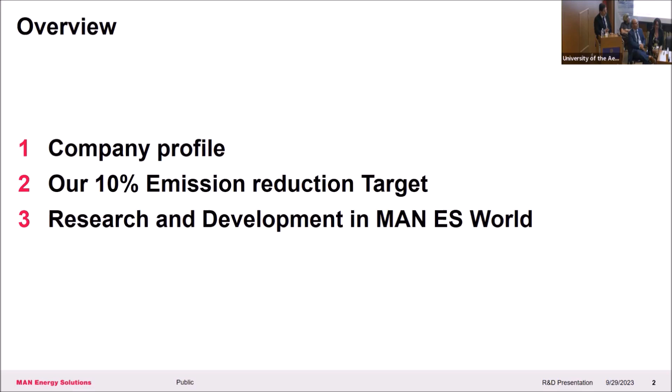What we are doing, first of all, MAN is well known about the two-stroke engines for the shipping industry. However, this is not the only thing that MAN is doing. We are part of the future making. This is our motto for the technology that we are building up. Part of a bigger family.

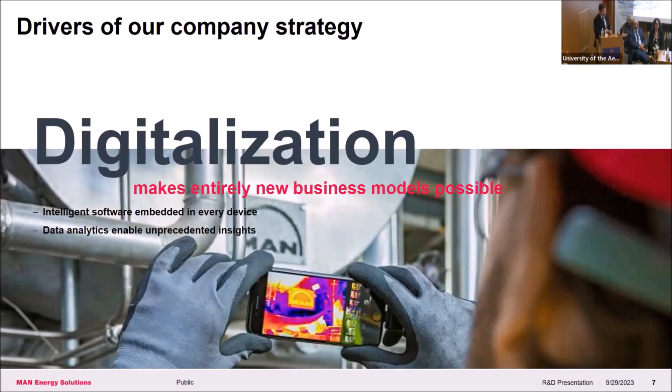So we have and we are building up technology for decarbonization, for digitalization. These two things are going together. And of course, we have also our main pillar, to move big things to zero, which means to contribute to the decarbonization till 2050 to be close to zero.

We try for that in many markets, in shipping markets, in the energy sector, in the heavy industries, the heating, in refineries. And as far as you can see in the next slide, we have a variety of products, not only the well-known two-stroke and four-stroke engines applicable for the shipping sector, but also carbon capture, which we are developing even in Greece with an engineering and R&D department.

We are working a lot in the hydrogen for production of hydrogen, but also for usage of hydrogens. We are doing on an industrial scale heat pumps for district heating, for big industrial companies, canning companies, or companies that need temperatures. And of course, for our sector, we are working on the retrofit of existing equipment, but also we are developing new green engines.

We have a very ambitious target until 2030 to contribute up to 10% reduction of the CO2. This is our ambition, and we try for that. With a study that took place almost 3 years, we identified that in specific sectors we can contribute with the numbers given in this table: 2% in shipping, 5% for carbon capture, 2% for heat pumps, and 1% for hydrogen.

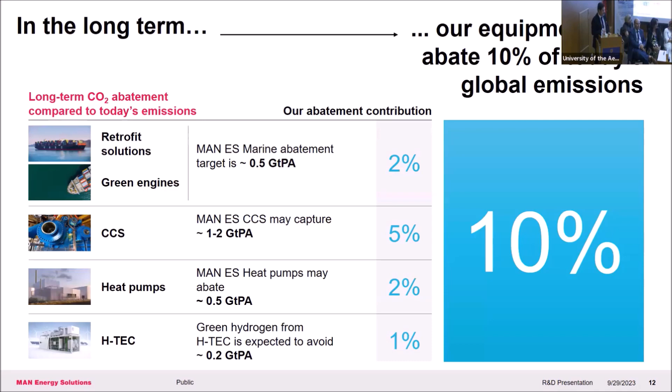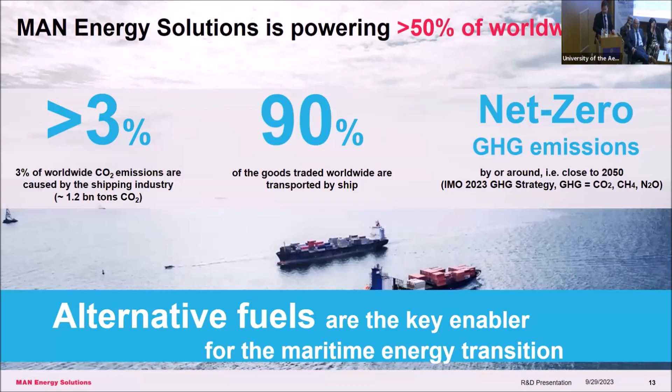More specifically, again, for shipping, you know how much the percentages are. We have, of course, a significant role in these numbers because we have a dominant position in the shipping market. Close to 80% of the two-stroke main engines are designed or produced now from MAN Energy Solutions.

Let's talk more specifically how we develop these technologies and how we communicate with the market. The traditional way is to generate the idea and follow this path: we generate the ideas, we refine the ideas, we assess, we make pilot projects up to a certain extent, and then we start the heavy stuff, which is the development and at the end, the scaling up of our technology. This is the traditional way for doing R&D.

However, we have seen over the last many years and decades that research is not only a process that has to be inside, it is a process affected from many factors, like, for example, there is the strategy and planning and business planning of the company, but we have to deal with the society needs, with the environment, with the new data status that we are facing, with the brand image of our company, the perception that the end users and the society has for our company.

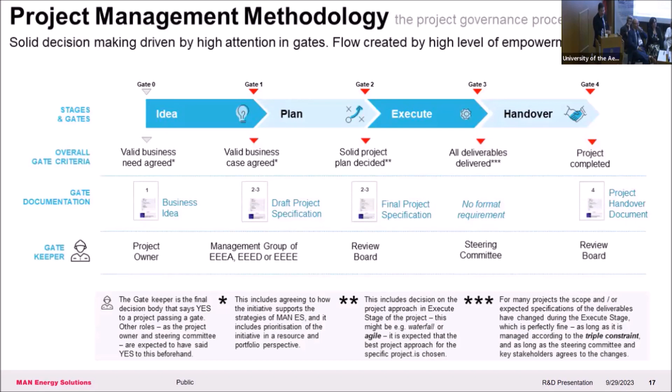Taking all this into account, we have a specific project management methodology for research and development projects, and it is governed by the principle of gates. So we validate a business need — first of all, we are a company, and so we have to take care about the business environment, the business objectives that we have. We create the idea, we plan, we execute, and we hand over at the end of the stage of the final product stabilization, our technology.

For the idea, we support overall the business and technical goals of the market strategy that we have. We try to use realistic technical solutions. We also identify the potentials that we have in the market in order to have a realistic and ambitious materialization and usage of our technology. We deliver the project as planned and agreed, and at the end, the market potential has been reassessed.

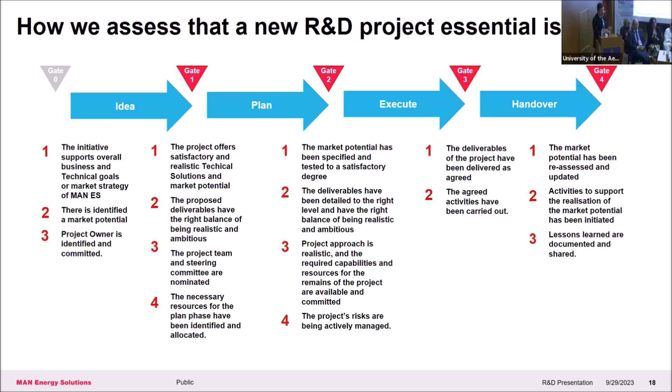We try to optimize and make the final tuning of our products. This is the process that we are following for the research and development strategy. Now there are 4 key questions.

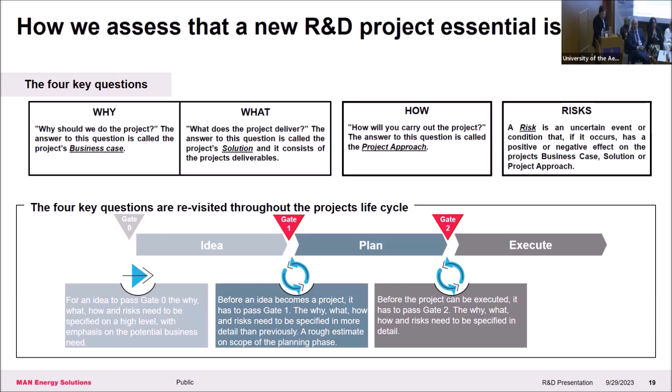Why should we do the project? The answer is called the project business case. What does the project deliver? The answer is called the project solutions that we are offering, which consists of the deliverables we want. How will we carry out the project? This is the project approach, and the risk. The risk is the uncertain event that will happen during this process.

Other factors that contribute to the decision process of research and development have to do with the idea, the regulatory framework, the customer request, the sub-supplier support, and the service experience. All of them contribute in order to adjust an R&D project accordingly.

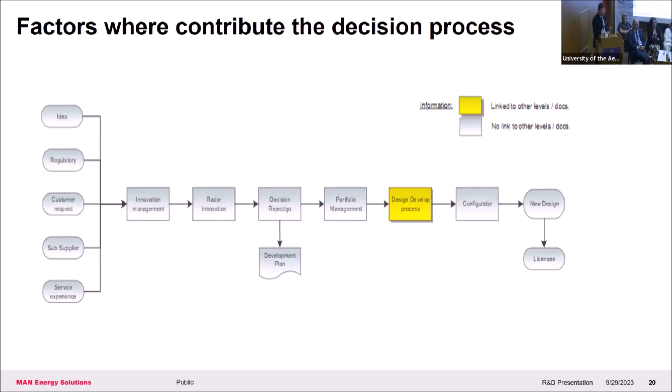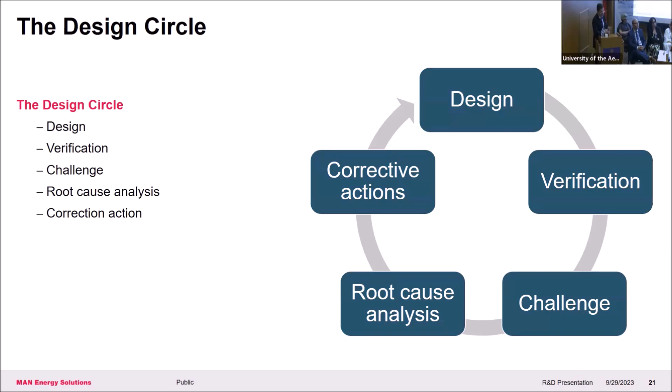We have the design side, which is design, verify, receive some challenges out of this verification, analyze the root cause of the problems that definitely will pop up, and at the end, proceed to corrective actions in order to deliver a ready-for-use product.

To deliver a ready-for-use product, we call it the product stabilization, where it passes through these 6 stages. We observe that there are failures that happen. We report and try to collect as much documentation and as many elements about this failure as possible.

We evaluate the potential solutions. We define the immediate measures, and also inform the customer to cooperate together to develop potential solutions. We develop and validate the solutions, and of course, at the end of this process, we roll out the adaptation that we have done to our products.

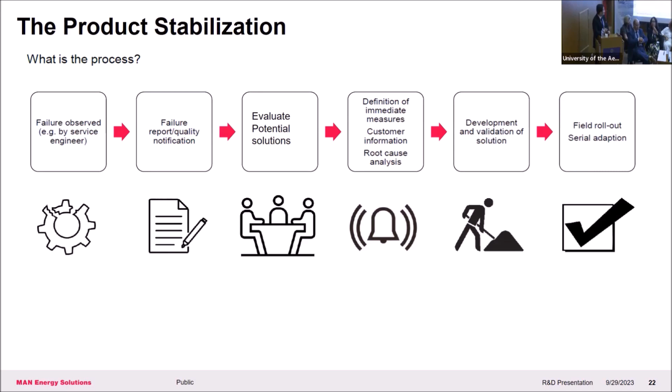More specifically about the 2-stroke technology, it is the dominant technology for marine propulsion till today. Our strategy has, at its center, the people, which is our most important asset, and also we try, through leadership, to have a sustainable organization.

We develop engines with fuel flexibility, the dual fuel engines, where there is a big discussion about which will be the second fuel. We believe there will not be one solution, it will be multiple solutions. We work, of course, for climate protection, and we develop the technology for the zero carbon approach.

Also, in the last many years, we have been working in parallel on our digital projects, where they are helping us for the development phases, but also for the operation phases.

The two-stroke R&D department has a significant role in our organization. They develop the engines, the exhaust gas systems, the supply systems, and the digital solutions for the usage of our engines. They cooperate with all the stakeholders, with universities, with shipyards, with ship owners, in order to ensure that we have the most significant, the most optimum solution.

We are working on a constant basis in our in-house test centers and also on the licensing side, creating - I will not call them only digital twins, someone from my colleagues here has mentioned digital twins - but also creating many times prototypes, twins, in order to verify in real life that what will be released to the market has passed all the gates.

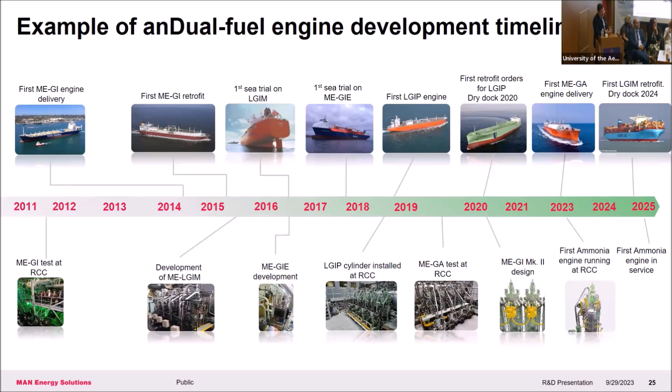An example of the development of an engine is the dual fuel engines that, as you can see, started in 2011 and are still in a development phase, and will continue to be in a development phase, but the fundamentals have been based since 2011.

This is not only applicable for the two-stroke engine, this process is applicable for the entire product portfolio, some of which I mentioned before, and has to do with offshore and onshore applications. Thank you very much.

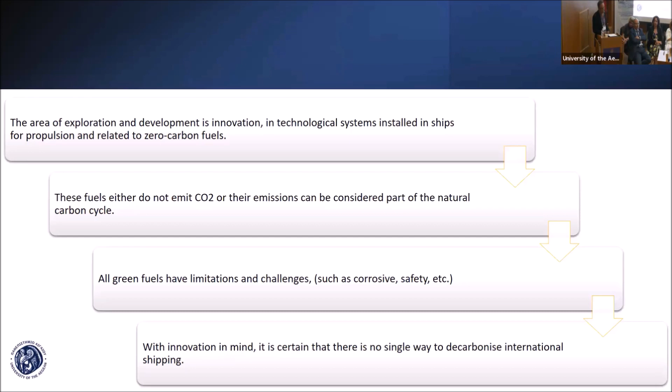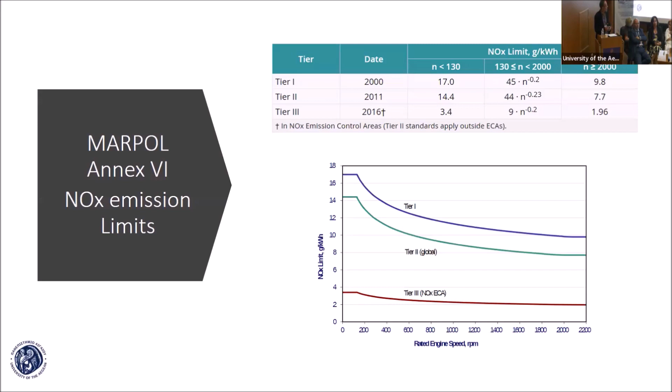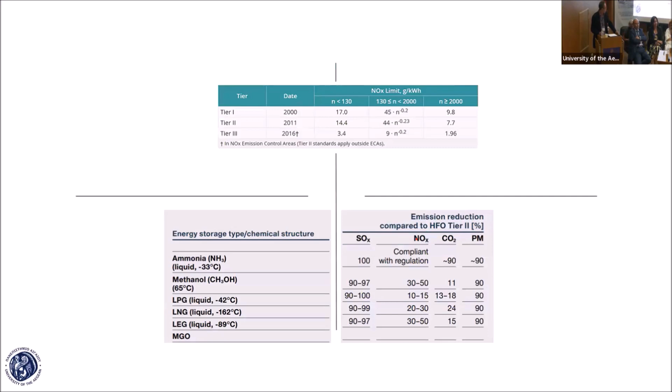MARPOL annexes about emissions of NOx—we have limitations already mentioned previously—and we have alternative fuels that can be used in ship engines: ammonia compliant with regulation, methanol, liquid petroleum gas, liquid natural gas, liquid ethane gas, and MGO, marine gas oil.

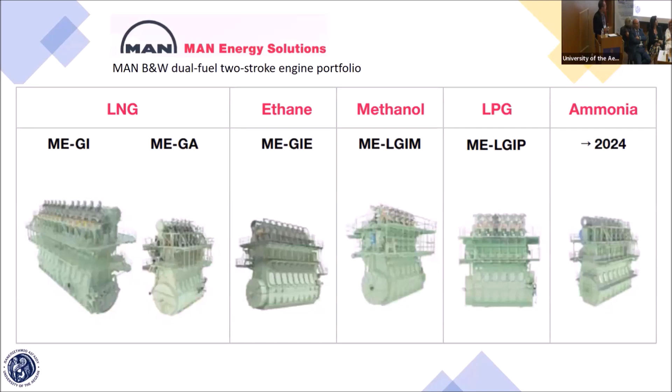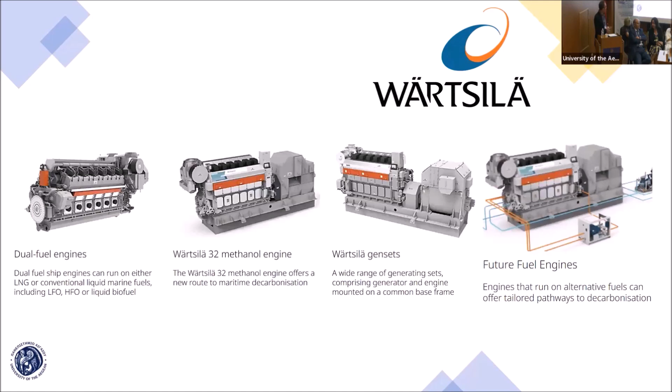This is the agent mentioned before by Mrs. Christodoulou, MAN B&W—how they can achieve this aim is the opportunity to use LNG on two-stroke engines. That's the previous engine, and gas engines, then ethane, methanol, LPG, and now ammonia and hydrogen. Also, Wärtsilä is another manufacturer of engines for ships at sea.

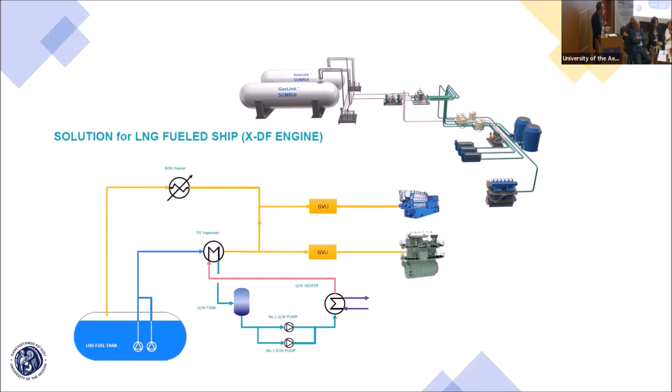What exactly happens is that LNG-fueled ships use an LNG system operating with the engines. LNG from the tank goes through the gas valve unit to the engine, and then due to combustion and operation with LNG, the two-stroke engines can use ammonia in the shipping system. This is shown to be very safe, because it faces challenges about corrosives and environmental issues.

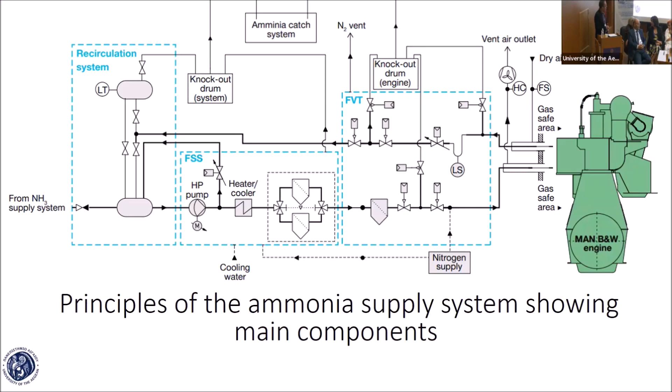What is happening, how it is inside—this is a cylinder of those engines previously seen, and the injection of that alternative fuel comes through the technology of this injector. The yellow system is the alternative fuel that is supplied to the engines.

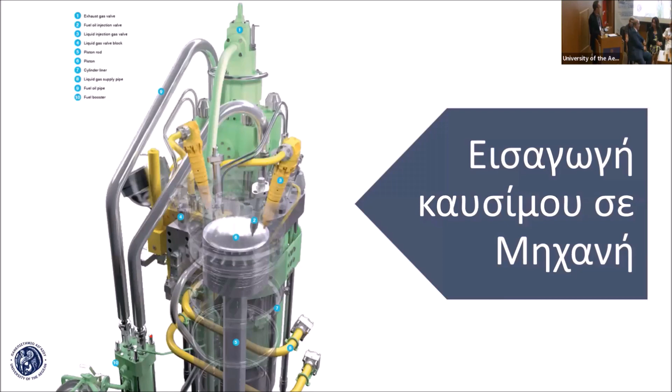Finally, the implementation of this technology in the maritime industry can face many challenges: cost, compatibility with existing technologies, data security, employing and training and education—and that's what we face in the future to minimize carbon dioxide in the atmosphere and environment. Thank you very much for your brief.

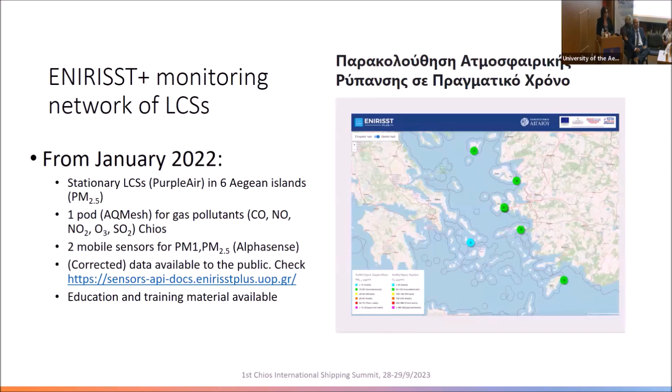We have employed a network of 7 sensors in the Greek Aegean Islands, within the framework of a research project coordinated by Professor Polidoropoulos and Hanopoulou. We have monitored several parameters, including particulate matter with a diameter of 2.5 micrometers.

The first step we have to do, and I have to focus on this, when we use these cheap instruments in order to have good data, is to evaluate their performance. If we evaluate their performance, we know how good our data is. So we did this, and as you can see in the graph, the performance of the sensors is quite good.

What they do is they're well correlated with the reference instruments, but they overestimate the concentration. So we applied an equation in order to correct our data and improve the accuracy of the sensors.

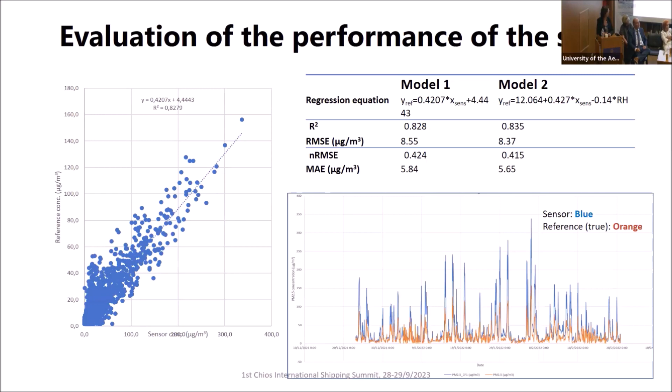So what we have done is several campaigns using these sensors. One type of campaign was in the port of Chios. We went there before the arrival of the big RoPax ships, and stayed until the ship departed, monitoring the concentrations of particulate matter at the port. We have emissions from the ship, emissions from cars and trucks, and of course the general background from other sources in the city and the island.

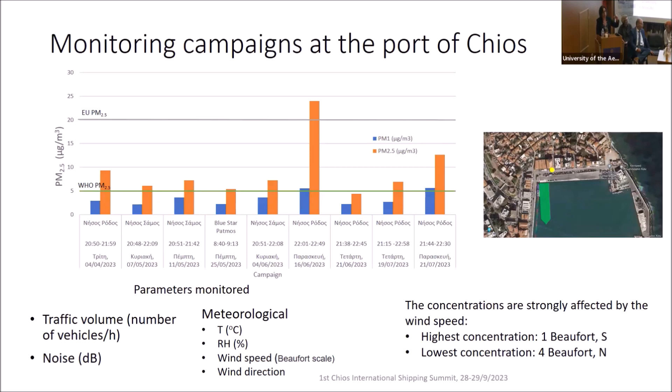I put a line there corresponding to the European Union threshold limit and also the World Health Organization guidelines, which are year averages. Our data are 1 or 2 hour averages, so I didn't put it to show exceedances of thresholds - I put it just to give an idea of what the limits are.

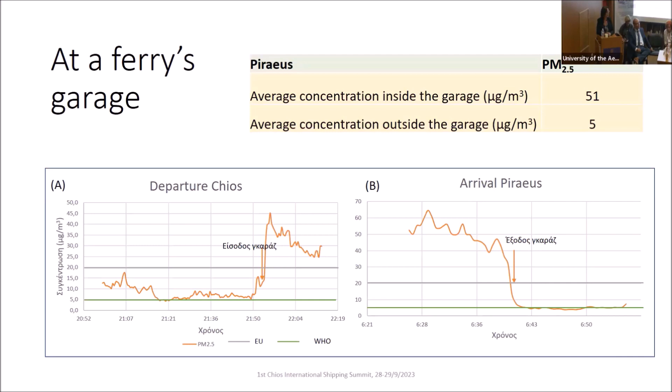Yes, could you please? Yes. And...

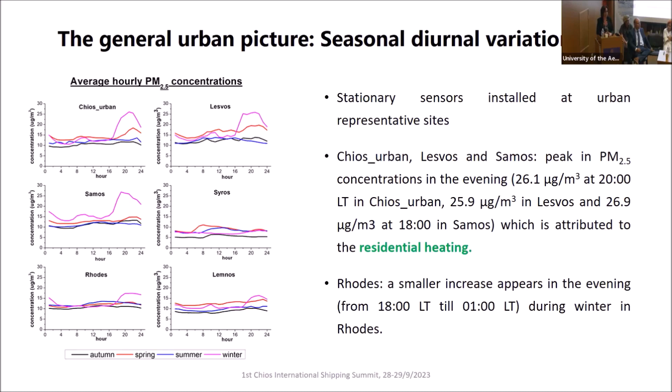The final thing I would like to show you is the general urban picture in Chios, because we have established a sensor near here in an area of representative pollution, and in all the islands. We found out that concentrations were high, especially in winter, and especially during the late afternoon and evening hours, which makes us confident to say that these high levels of pollution in winter are caused by the heating of homes that now use biomass, like in fireplaces and stoves. So we believe the main source of pollution in the islands is this heating. Going to the conclusions, thank you very much.

So it's important to monitor the air quality because it is dangerous for public health. And all these climate mitigation measures talked about today help with this, because we use less fossil fuel burning, and we have the very welcome side effect of less toxic pollutants in the air.

These sensors could be used in supplementing the official networks of sophisticated instruments. The very important thing you have to do is check their quality, to know the quality of the data, because data of unknown quality are data we cannot use.

Finally, this data can be used in raising awareness of the people and also in informing the decision-making process to take measures to combat the pollution. Thank you very much.

Following this, I'm adopting one of your sensors in my bedroom, which is not very far away, and I can correlate that with the smell when the ship's coming, or when the neighbors are starting their barbecues.

Exactly. So it is time now to wrap up. Can we do something about cooperation between research and industry? Okay, great.